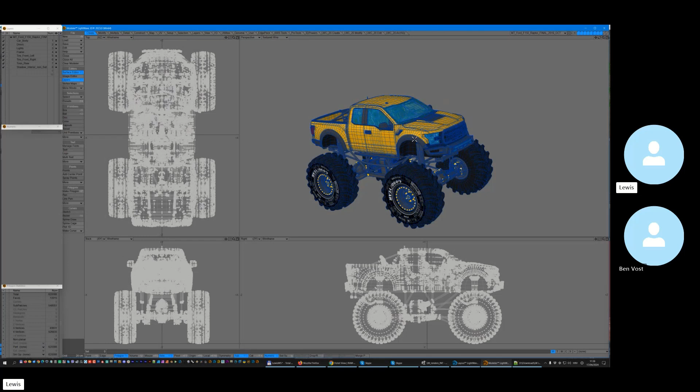The Crew 2 was the one where they had several cars, boats, planes, everything - you could jump from one to the other. So they sent me the low poly version of the car, and I had to create a high poly version for the game cinematics, because the low poly wasn't enough for that.

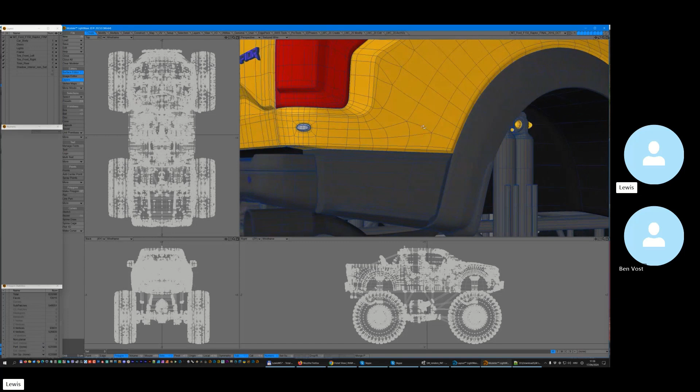So everything is made with subdivisions here, subdivision surfacing. I had to create tires and the suspension because they wanted a Bigfoot version out of the regular car. So yeah, screws, bolts, everything is SubDs. Only the interior in this car is the low poly one, because it was just looked at from outside, so there was no point.

I suppose it didn't matter so much. Yeah, it's already a low poly mapped interior, so there was no point recreating the interior, but everything else had to be done - all the gaps, and stuff like that.

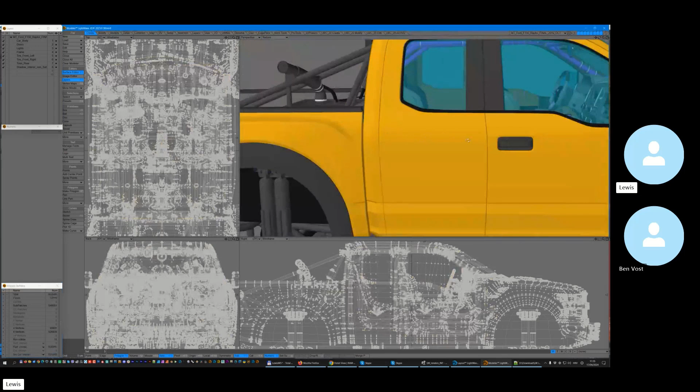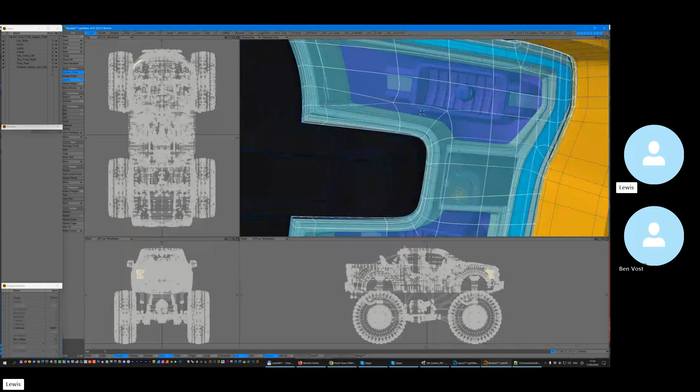Wow, and how long would a car like this take you to model? This was a different one because I didn't really start from blueprints as you usually do, like importing the blueprints and starting. It can take 2-3 weeks if it's a high detail one, because I even have the interior of the headlights - if I remove the glass, you see the bulbs and stuff like that, even the small details. Maybe it's too much, but I'm stuck on the details.

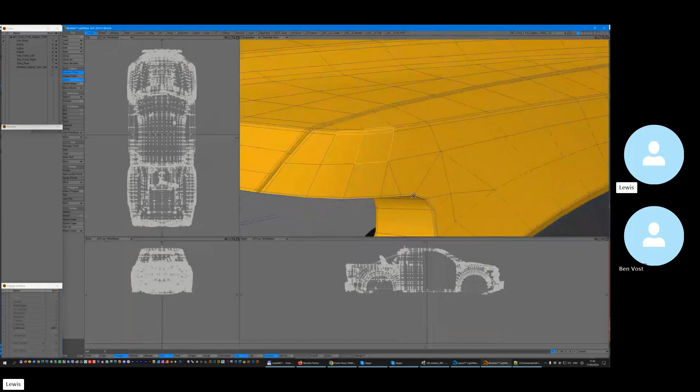You're just addicted. Yeah, and it's always nice when you have subdivision. See, I had to add edges, bevels on all, smooth, and when you hit SubD you get nice rounded edges. It's like infinite detail - you can get as close as you want and you won't see segmentation, because in Modeler you can just increase the subdivision level, or even in Layout. It's flexible, it's parametric, it's not really frozen at any level.

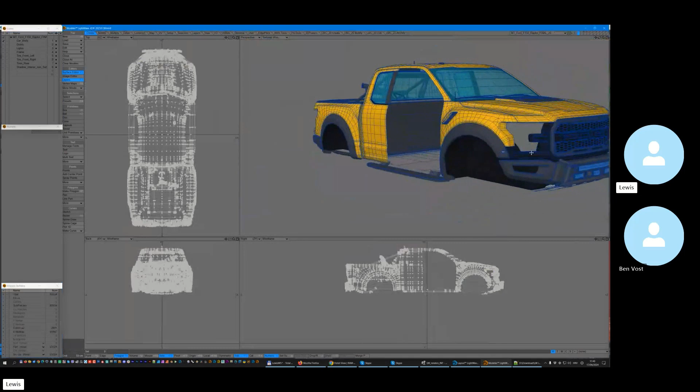How many polys is this complete object? It says here, for the scene, but the complete object in Modeler is like - about 500,000.

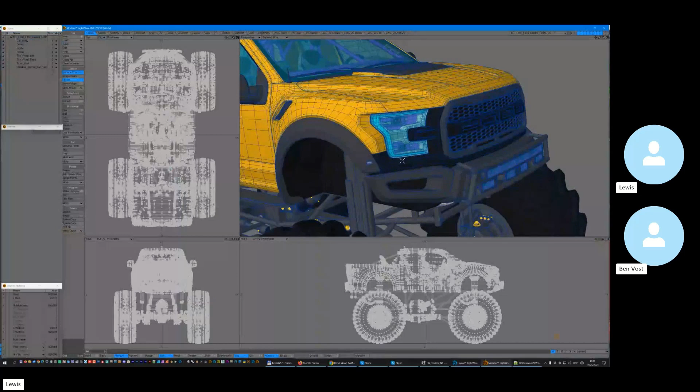620,000. Wow, there's a lot of polys, and since I was a sucker, I made them subdivision also.

Even though they will never be seen up close. I didn't really know how, because I wasn't doing the animation, so you don't know what they are going to concentrate on. I gave them the best for any close-up or whatever they want, so they don't need to hide anything. That's the key part - I don't really like the model when you need to hide it or make separate camera angles so you don't see that I didn't model the back of the car. So no Hollywood trickery for you where you only make the front of the building or anything.

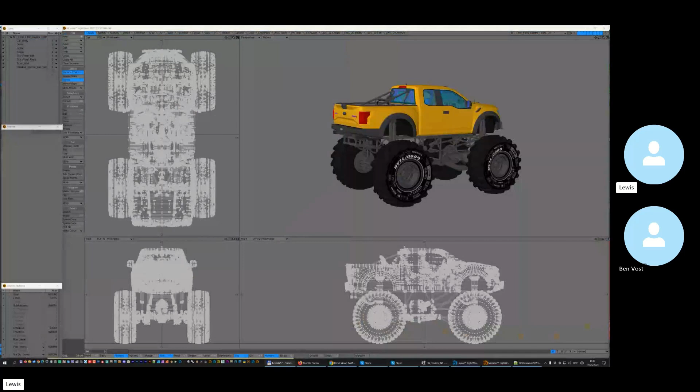Yeah, and basically I just did everything and they liked it. And in this project I had to do multiple models, so here's another one. Let me check the other one - it's loading. I started because I used Octane for rendering, but I didn't get hired to do rendering. They just gave me permission later on that I can do it for my portfolio. And see, this is Octane render.

Nice, and I have separate settings of the render passes and stuff like that. So now I have a glow, I have medium volume so you can see a fog slide, and now that Lightwave has Octane included, I can really do that. So it's really, really cool if you have the hardware.

So how long have you been using Octane? Since version 2 arrived for Lightwave, so since the beginning basically. I didn't use it for everything, but slowly I did progress to use it to see how fast it is. I mean, okay, I have a lot of heavy hardware - I have 3 GPUs in this machine, so of course it's fast, but I had to do animations now.

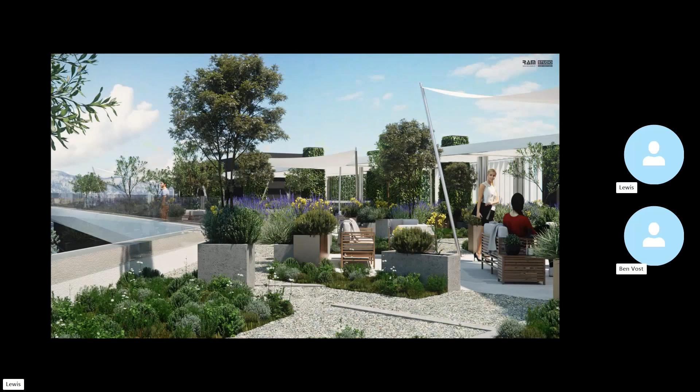These rocks in this scene are all instances. Do you have anything else that uses a lot of instancing today? Yep, let me show you one big project. Let me show - I have renders on my second screen, so I'll pop them out. Okay, show them. This project was the roof of the hotel. All these things are now, of course, instances, because one of these plants is like 500,000 polygons, or 1 million for the tree. So you cannot really do that with cloning in any software now. So instancing is very, very important. And there is a good thing in this - let me show this, or this - and I can show you that project.

Go for it. Yeah, okay.

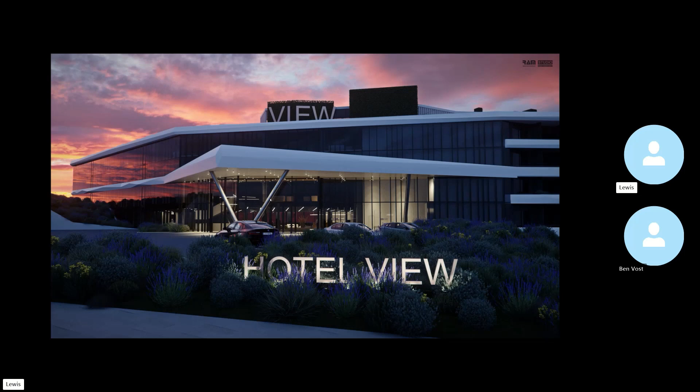So this is the hotel called View. This is the render of it, the lobby entrance, and there are more shots of this. This is the hotel, a mock-up of course. I had to render outside and the rooms inside, and all these plants on the roof, stuff like that. It was really, really great for that. This is interior shots.

This is the roof, lovely, with so many plants. And see, now we are inside the hotel, and I zoom out.

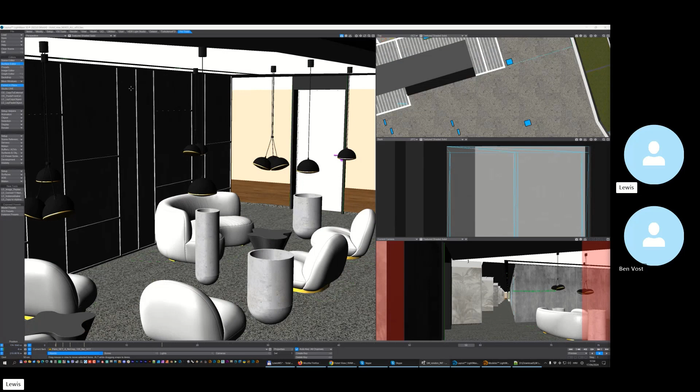Oh wow, you did the whole thing in one scene. Yeah, everything is there. I mean, I didn't furnish all the rooms because they didn't need renders for all the rooms. But see, I have a background view from the actual location, because the guy went there and made me a panorama, because otherwise it would be silly.

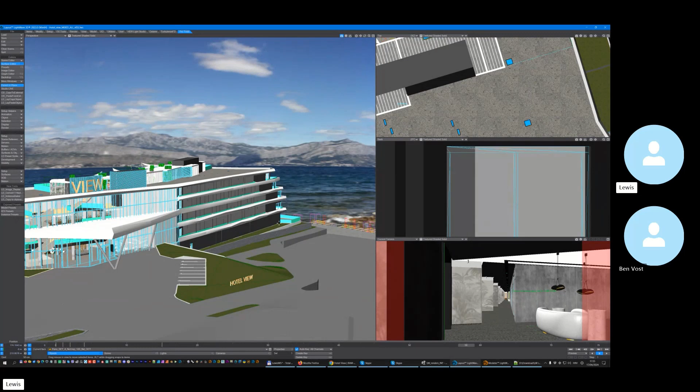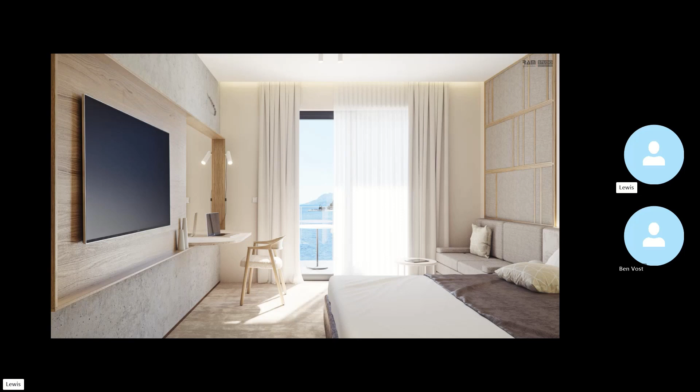So that's what you see through the windows when you look in the hotel. When I show you the view, see, this is the render from the room, and that's the actual view which is there. And this is on the coast of Croatia.

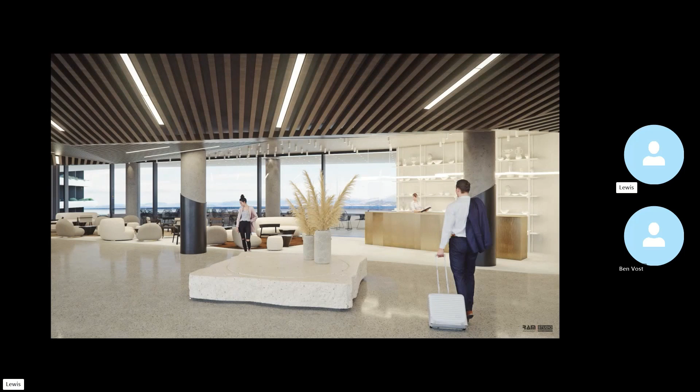Yeah, so beautiful, see a lot of views, city, mountains. This is on island, and this is the Croatian coast.

Is this one of the scenes that you had to use native render for because of too many lights? Yeah, not this one, but I had one with a lot of lights. I think this one is even not that much lights, maybe a few hundred, 269. That's not really that much.

No, it's nothing. Usually I have like... I had one project which was only possible native, which had 11,000 IES lights in the tunnel. Wow, 11,000 lights. Yeah, IES, and I had to clone them on the actual light geometry.

And the OD tools, now bought by Lightwave Digital, helped so much because there is an option to clone light on the instance. So all the lights were positioned, because the tunnel was not really a straight tunnel, there were curves and dips, and because it was the tunnel between Europe and Asia.

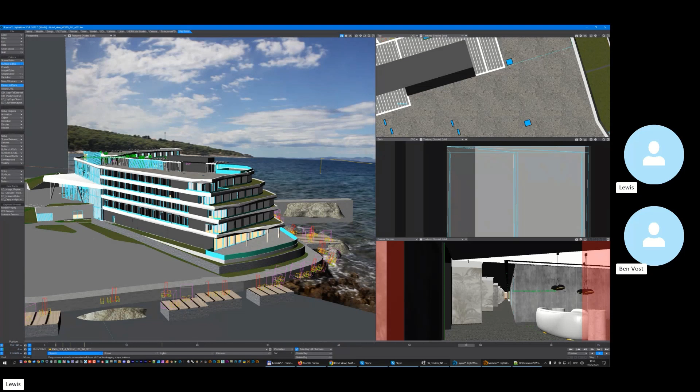Of course, and it was a real tunnel, it wasn't just a straight line. And the great thing with the OD tools, see all this furniture and everything like plants is now shown like dots or boxes. See how cool the responsiveness to Lightwave is now, because everything is so easy.

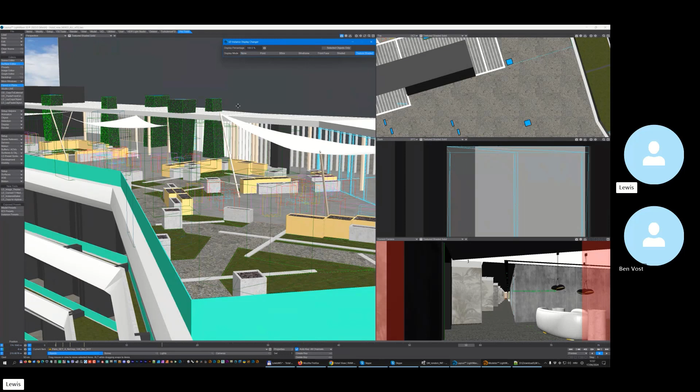So now you go to instance, type in instance GL display, and you can use select only object or everything. See, if I switch to texture shaded, now there's billions of polygons in this scene, so it takes like 10 seconds to show them. But now you see everything, every single plant, every single chair, and trees and stuff like that.

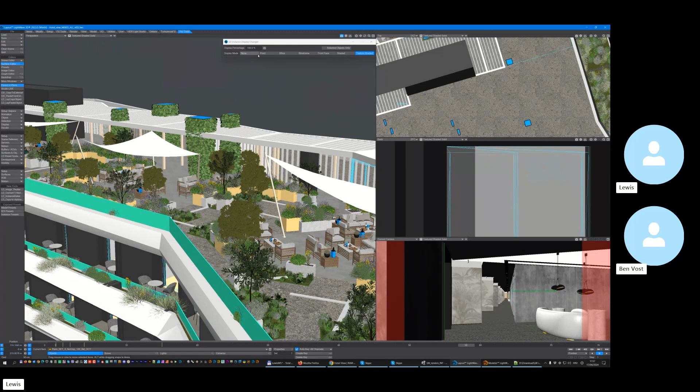Can you move the view around? Yeah, that's going to be tricky. See, it moves, but with billions of polygons it's really hard. That's why you can switch to points, see how it's fast now. See, and you have them all, you still have them in the render.

This is just GL display, and this tool helps immensely, because otherwise I would need to go through every single instance, check settings here, and change this menu for every single instance I have.

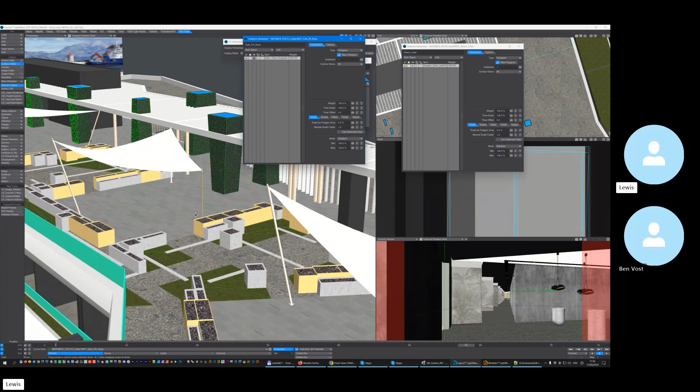See, all these have some kind of instance, like sofas. See, these are for the sofa. If I switch that sofa in the lobby, we don't even see it here, but in the lobby of the hotel and stuff like that.

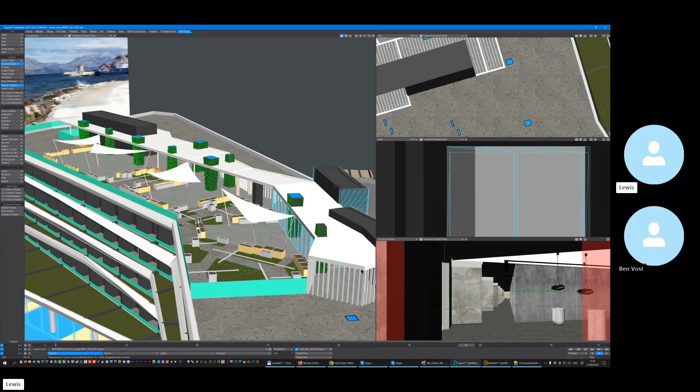So this is an amazing helper, a quality of life thing which we got with Lightwave 2024, and that's really, really important. It's not just about fancy big features. Everybody likes the fancy big features, but these are the things you need for your day-to-day work, so that's a really important one.

That's fantastic. Thanks to Lightwave Digital, we got the OD tools included now in Lightwave and even updated, so that's the biggest part. Before, definitely with NewTek, there were some plugins, they just bought the plugin and never updated it. So that's kind of different now - you get the code and you can update the plugins, which is absolutely amazing. So thanks to Lightwave Digital, we have that now.

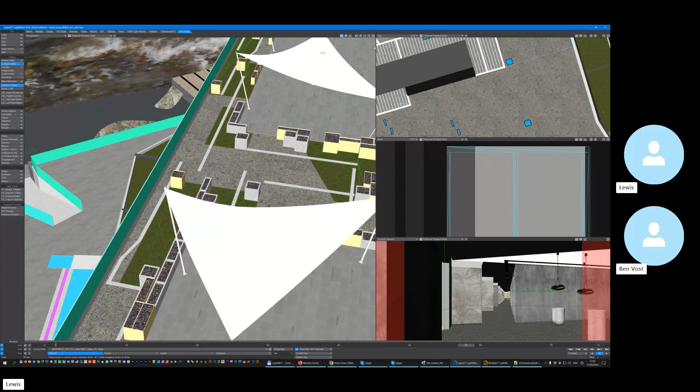That's brilliant. Let's move to something else.

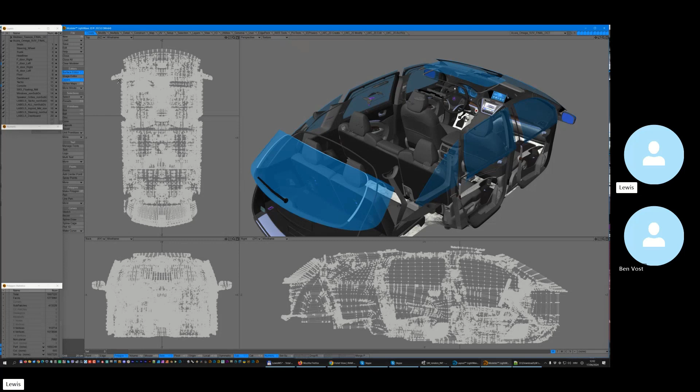So let's go to... Okay, so basically this is one of the many cars. I've built over 100 car interiors in Subpatch subdivision, or Catmull-Clark as some people call it. I don't really like n-gons in subdivision, so I always use the Subpatch mode, and this is a really dense model.

Let's switch - I have shortcuts for the wireframe stuff. I'll show you, these are polygons. Let's turn off the windows. See, that's better - it's all modeled here. There are no sheets except for this texture, of course, but that's UV mapped.

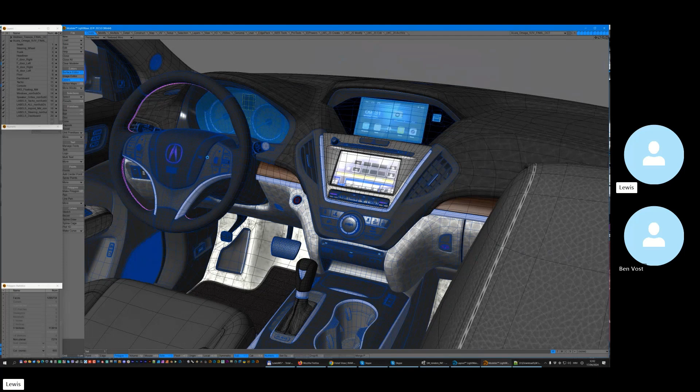So you've modeled things that other people would just do as textures. Yeah, because this stuff is for creating car catalogs and things like that, so you don't really know it's not really a real car.

See, this text is embossed. Wow, see the core - even the button stickers are 3D geometry. Oh wow, the text on the buttons is modeled. Yes, you can easily turn it on or off when it's glowing - it's not really drilled into the button.

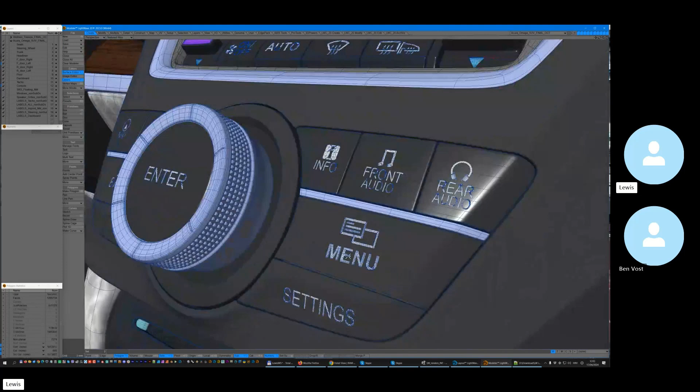That would be really overkill. But on the real car it's drilled, and this is like - either if it doesn't need to shine, it's white color, but if it needs to have a backlight, then it's drilled and you can make it glow.

The only texture is this screen, because we didn't have anything to put there since it's just a flat screen. But see the tacho numbers and the dash, see the numbers, also modeled, and that looks like this when you run that.

See? Yeah, so you can glow the numbers easily. You don't need a separate texture map for glowing numbers - it's just in the texturing. Yeah, everything is. So this is a render.

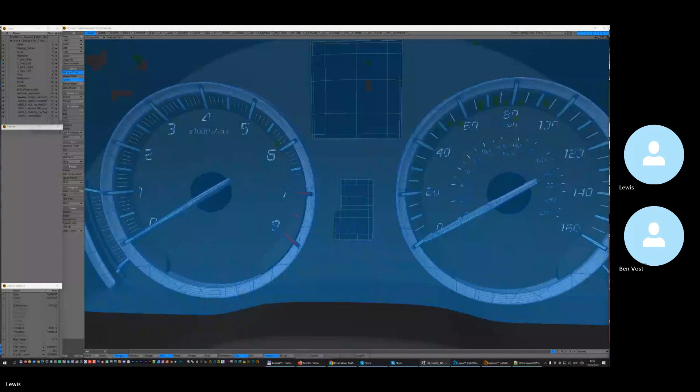Yeah, there's a map, and I render those in 5K or 6K. See, even the rear mesh is modeled - this is not textured. On the speakers there's like over 1 million polygons on the speaker grills, because you get to do the whole car interior, not just the front - let's see the backside seats, stuff like that.

The stitching here is texture, but the stitching on the steering wheel is geometry. See?

Amazing, okay, so this is obviously a big project - how long did you work on this car for? 34 days, full days, like 8-10 hours, depends.

To be precise, I get what they call scan data, but that's not really the scan you'd think it is. It's either.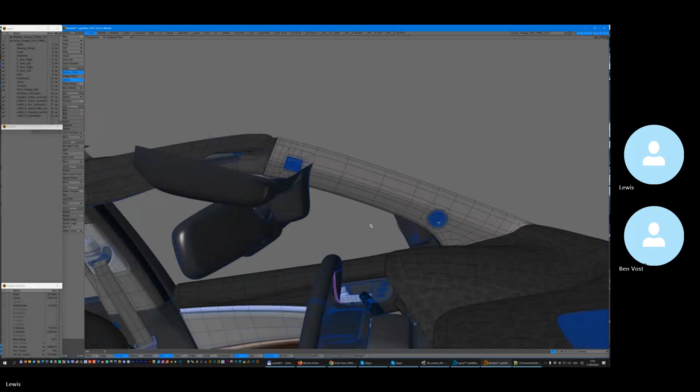Amazing. You are crazy - or not crazy, but your attention to detail is crazy. It's a sickness. It's the side curtain - wow.

And this one is really tricky because it has to be embossed, so you need to raise the subdivision, but it's still subdivided - it doesn't really suffer any. You can show it from any distance, it doesn't really matter, it's fine.

You see it here slightly, but I don't know what angle they render because this is not texture - I mean, it could be overkill, but the client did not want any textures, they just don't want textures. And I think they used Keyshot or something to render the catalogs.

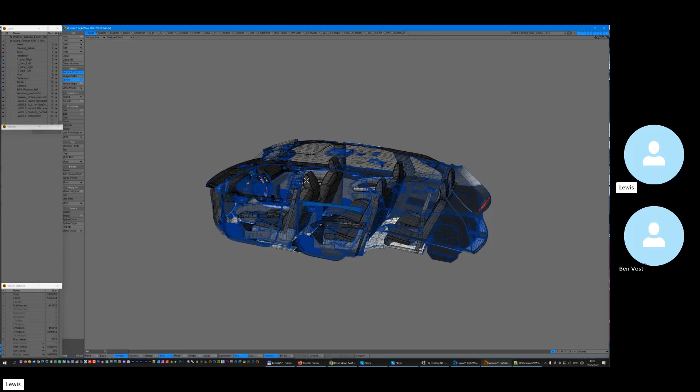So they just want specific labeling and everything for the layers, so they can do it in any software. They don't really care which software I use or they use, they just want it heavy. So do you give a precise model? Do you give them LWOs or do you give them...?

It's usually OBJ - everybody likes OBJ and everybody reads OBJ because there is no mapping. I wasn't really hired to do the texture. They do the texturing on their side, but there's very little texture.

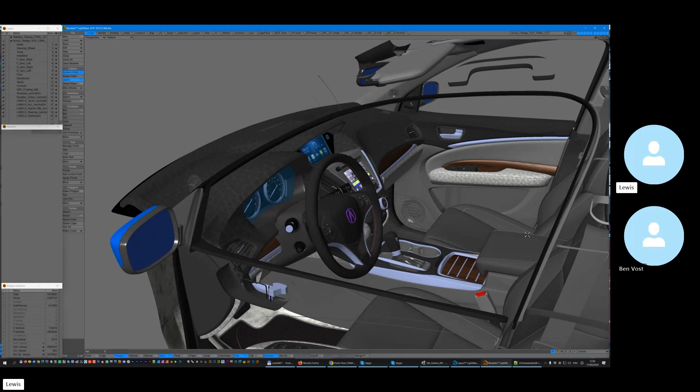You just slap the leather on the seats and some kind of rubber on the dashboard, and everything else is geometry, so it's easy. They can turn lights on or off, so there's no hiding. And obviously, there are no sub-patches in OBJs.

So when you export, is it purely text files of triangles? No, it's quads - all quads, yeah. You just get this basically, and I can subdivide on their software. That's it - it's not really heavy.

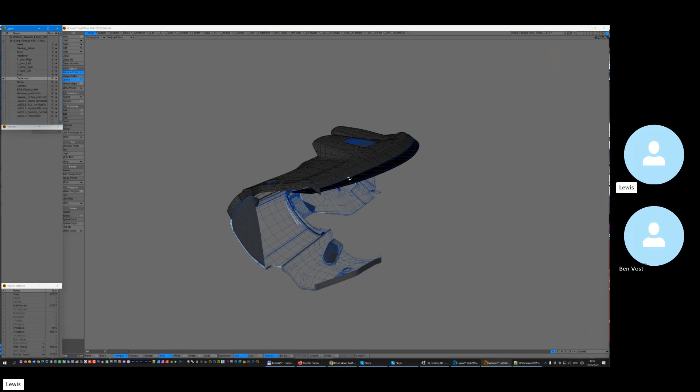When you look at it like this, like the dashboard, see there's a lot of heavy stuff, but I have a specific system in Lightwave - I create a base, and then I see whether I need to subdivide or not. In this case, I go 2 levels up to subdivide.

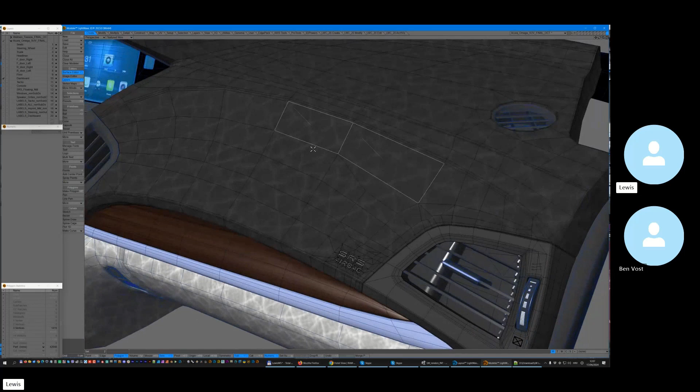And then you need to - well, see, this is like a transition from more polygons to less polygons, so you don't need to subdivide completely. Yes, of course - so you have areas that step up and areas that step down.

Excellent, okay. Lewis, this is just amazing, and I could go on for ages just fanboying over your work, but I don't want to keep your whole day occupied with this. So thank you very much for showing us all this, and we'll speak to you again soon.